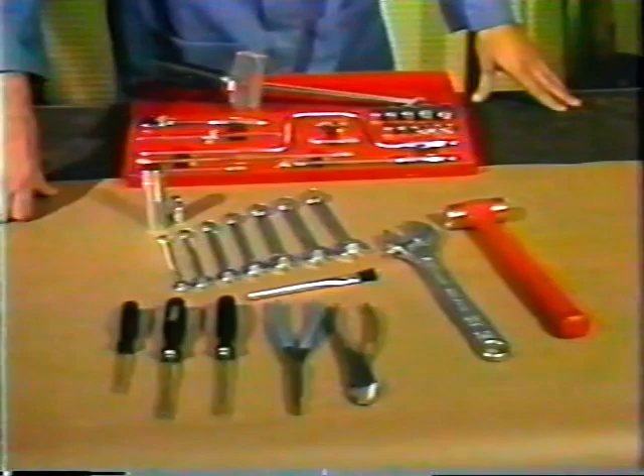We do believe you should become sufficiently conversant with the workings of your airplane to effectively oversee your maintenance program. You should know that FAA regulations allow 28 maintenance functions to be performed by pilots, with the caveat that the work be approved by an A&P mechanic or an approved repair station. This is called owner-performed maintenance or preventive maintenance.

If you are interested, we refer you to Appendix A, Section C of Part 43 of FAA regulations. Several places offer short courses in this activity, and we have a very inexpensive tape that teaches the most important procedures. We suggest that you form a partnership of sorts with your local fixed-base operator in the maintenance of your airplane if you decide to go this route.

This person will very likely be as interested as you are in keeping your costs down and may welcome your increased capability to report service difficulties. In spite of a few bad apples who have tarnished the business, the average FBO is the backbone of general aviation and is driven by the desire to have you be happy with your airplane.

In this tape, we discuss problems that are often generated by the bad apples. Throughout this tape, we will refer to SDRs, or Service Difficulty Reports. These are reports filed with the FAA by maintenance people, FAA agents, and pilots.

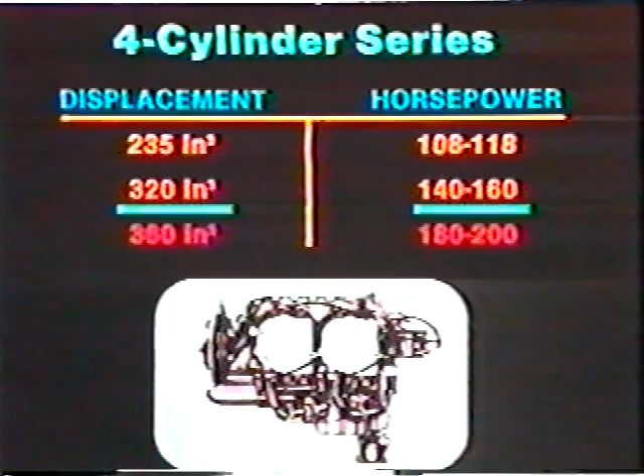We will start with a look at some possible problems that might be encountered in flight. We will look at the cockpit and examine closely those operational functions controlled by the pilot, what happens when systems are activated, and what an observant pilot can do to spot and correct incipient problems.

A minor problem in an airplane is not like a minor cold in a person. Left untended, the cold will go away, but a minor problem in an airplane may quickly deteriorate into the aircraft equivalent of double pneumonia. Our only assumption is that you are a pilot interested in more safety and less cost, and want to be able to know enough about your airplane to report discrepancies and fly it efficiently.

Let's look at a little bit of the accident background of the 172 and a few areas that might cause problems now and in the future. We should point out that the scenarios we have chosen here are usually worst case, but with a little forethought are easy to avoid. It doesn't take much skill to fly safely, but what it does take is knowledge to know what to avoid.

We have studied over 13,000 accident reports over a 3-year period, and are happy to report that the 172 comes off very well. When one addresses the rate of fatalities per 100,000 hours flown, the 172 is very nearly the best in most categories in comparison with other general aviation aircraft.

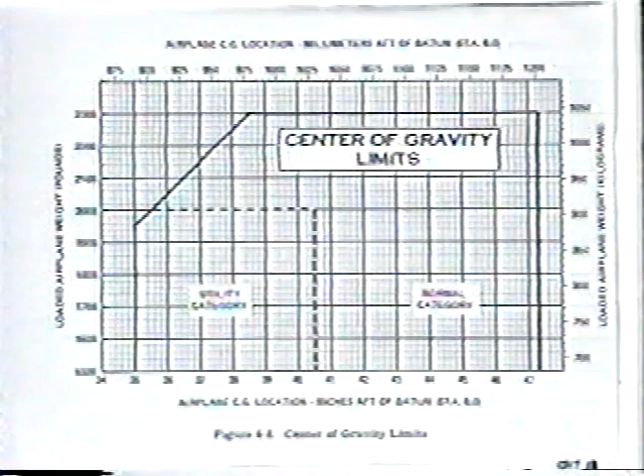These sequences highlight the need to keep the center of gravity in an approved range. This should be true at all times, but it becomes critical when the airplane is being pushed to the edge of the operating envelope. You may be assured that a far aft CG makes a difference in the flight characteristics of the 172, and will make the person who toys with this configuration an unpaid test pilot.

In fact, the normal spin characteristics of the 172 are rather benign. With the introduction of the 172L, and for later models, the dorsal fin was extended forward, and it is difficult to get a clean rotation without using unconventional methods.

A normal entry technique may produce a wallowing, nose-down turning moment to the right, and a nose-down spiral to the left, with an unacceptable speed buildup in either direction. This speed buildup is serious.

The extreme nose-down attitude will have the airspeed approaching VNE while the pilot is contemplating the situation. Each second will magnify the problem and limit elevator pressures to be used in recovery.

The worst configuration imaginable for degrading spin characteristics in this airplane would be a venture outside the utility category with passengers in the back seat and, to ensure graduation from dumb school, lowered flaps. If you are lucky enough to recover, it is almost certainly guaranteed that you will never try it again.

A fairly common accident cause is overshooting a turn and trying to correct to the desired point with back pressure and steepening. This combines the worst of all worlds. The steepening bank and the G-loads imposed by back pressure can be excessive.

If the back pressure is violent enough and the controls are crossed, the airplane may try to snap into a spin. In the 172, this may translate into a downward rotation which has most of the bad characteristics of a spin, and a few of its own.

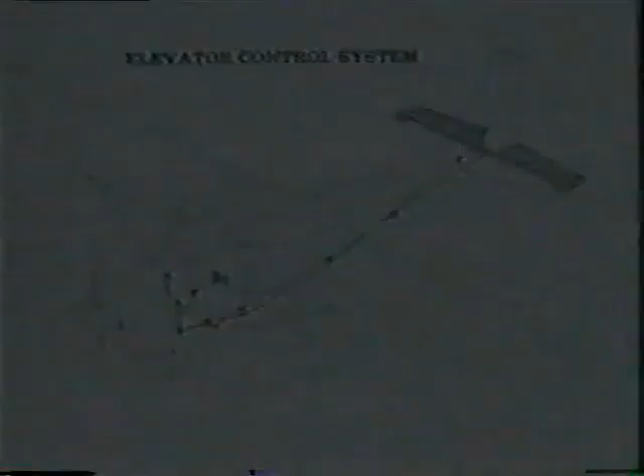We will now look at the flight control system on this airplane and reinforce the information from tape 1. We are not interested particularly in the aerodynamics, but we are very interested in what can go wrong and what you, the pilot, can do to prevent problems by simple observation and early action.

The control lock should be removed. The inclusion of this item on a checklist may seem unnecessary, but we can give chapter and verse of attempted takeoffs when the removal of the control lock had been overlooked.

The check of flight controls is seldom performed in a thorough manner, in spite of the fact that malfunctioning in this area can leave us with a primitive form of an unguided missile. They must be locked and secured before we leave the airplane after a flight, and they should be thoroughly checked before a flight.

The SDRs detail incidents of elevator flopping in wind after a thunderstorm, and another: elevator downstop bolt found bent and broken out of attaching nut plate, damage due to not using gust locks, very costly. These two incidents were not unique. They were taken at random. A number of owners paid dearly each year because of this moment of carelessness.

In this check, we are interested in freedom of movement. The mechanical linkage, the cables, pulleys, and attach points all offer opportunities for failure. The routing on these cables is through areas of wiring and tubing which may impinge on the cables if they become loose. A likely wear point on cables will be at the cable area where they cross a pulley.

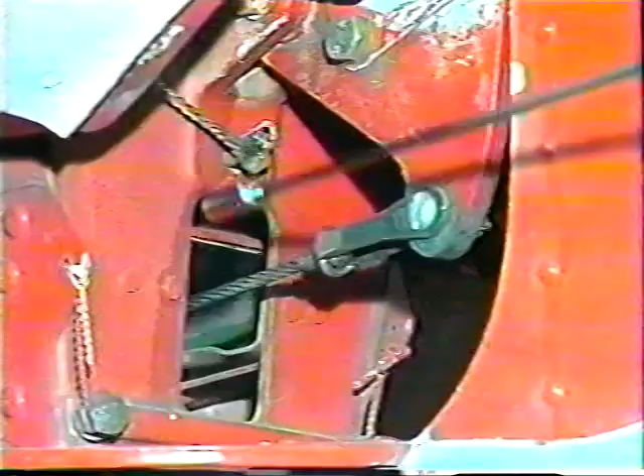We cannot overstate the importance of the provisions for security in very critical items on the airplane. Attach points, hinge points where direction of motion is changed, and all the other points where a bolt or a unit of some kind must be secure are protected with the additional margin of safety provided by safety wire and cotter keys.

Castellated nuts like the one shown here fulfill this function very well if they are equipped with cotter keys. When you see one not so equipped, you should find out why.

In this area, aside from skin surface, we are interested in full freedom of movement of the controls and tabs, and proper response on input from the cockpit. It may be wise to have someone activate the controls while the pilot observes. Always be certain that trim tabs are returned to their proper position when this is done.

The manufacturer has a published cable tension number which pilots and mechanics may find distasteful. Often we hear that the manufacturer's numbers do not provide the control feel that they desire, and the tension is changed, often as much as 30%. This may be operationally pleasing, but we suspect it would be indefensible in court. An owner pilot should know the manufacturer's recommendations and compare them to those on his airplane.

The aileron system is quite simple in design, but you will note that the cables run through several 90-degree bends en route to the surface itself, which makes the security of the pulleys very important. The cables also rise to the wing through an area very prone to corrosion. The aileron check follows the same procedure regarding feel and sound as the elevator check.

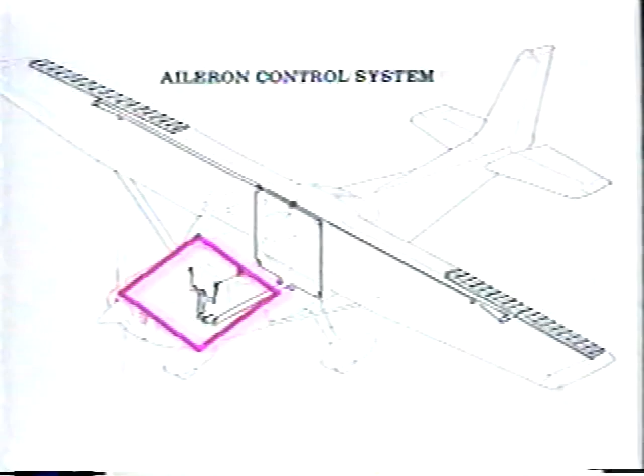We call your attention to the connecting chain and sprocket behind the instrument panel. If these become sufficiently worn and loose, all manner of unpleasant things could happen. The check on this is to hold one wheel firmly and rock the other one. If the play seems excessive, ask an expert. It may be a very important question.

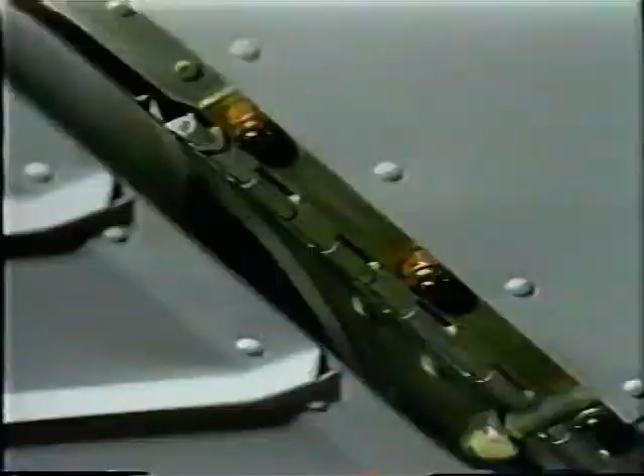Other possibilities are equally entertaining. Consider this service difficulty report on a 172N. Quote: found aileron cable rubbing into fuel line in right rear door post area. Cable had rubbed through protective cover and slightly scored the fuel line. The fuel line support clamp had worked loose and the cable was improperly routed, allowing the cable to contact the line. Unquote. The ailerons are attached to the trailing edge of the wing by 3 piano wire type hinges on each aileron.

This type of fastening was made famous by the aircraft industry of England in World War II. Hinges are secured to the trailing edge of the wing by screws and nuts. The hinge pin is secured by cotter keys in a track very carefully drilled to block the removal of the pin until the key is removed. We have seen reports that the drilling has been less than perfect in some cases, and the keys block nothing but air.

AD 83-22-6 refers to this, but the problem has been found outside the serial numbers covered. Check it out and be certain that cotter keys are there and in place. Like other types of cable systems, these seem to invite intrusion by foreign objects, and this SDR reinforces our argument that a good control check is worthwhile.

Quote: found aileron travel slightly stiff, found a retaining button used to hold control shroud jammed between cable and pulley. Unquote. A prudent person keeps buttons buttoned.

The attention given to the rudder on the airplane by many pilots seems to be confined to wiggling them a bit on the control check and wondering why it seems to be so hard to keep the ball in the center in flight. The very simplicity of the system seems to cause us to frequently dismiss it as being trouble-free.

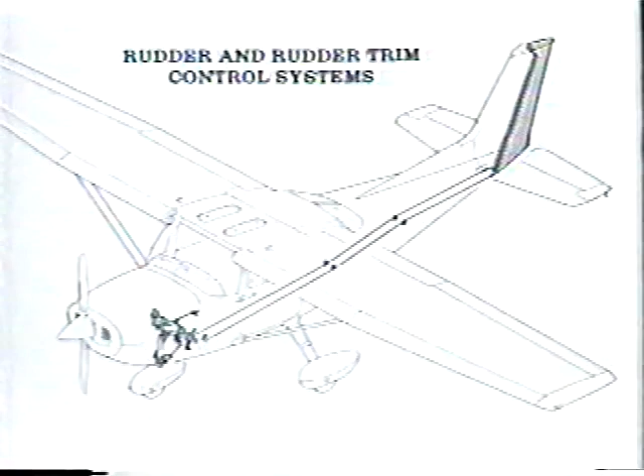The rudder pedals are straightforward and apparently would do justice to a 747. In conjunction with the brakes and a little help at the nose wheel, they steer the airplane on the ground.

We submit the following SDRs for your consideration. Quote: pilot reports aircraft required more left rudder than usual. Rudder torque tube bearings attached to aircraft structure are pulling out of floor and support structure. Unquote. And, quote: during a 100-hour inspection, it was noted that the rudder pedals on the left side were loose. After removing the rudders, it was found that the pivot shaft holes were worn. Submitter recommends a very close inspection of the rudders on the left side.

Unquote. Much of the rudder mechanism is visible to the pilot on a walk-around inspection, using the same standards applied to the other movable surfaces.

We suggest that, as you leave the cabin for the pre-flight, you apply side force on the pedals and rock the pedals back and forth with your hand. Note the relative simplicity of the rudder movement. You may move it with your hand and see several important points which are readily visible.

As with all the surfaces, the attach points and the rivets supporting them to the structure, and as far into the leading edge area as you can see, must be monitored for security and corrosion.

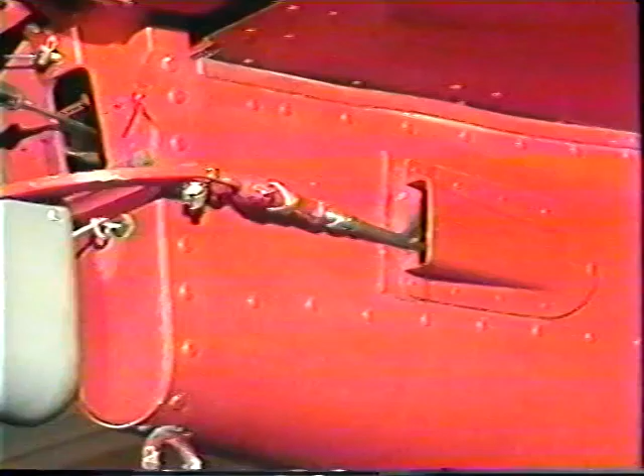The fittings which control surface movement are particularly important and should be looked at very carefully. Beyond this, the cable system which transfers the pilot's input to the surfaces should be a matter of concern.

If we go into a careful and thorough pre-flight and walk-around inspection, we will be able to get a handle on the maintenance standard that has been applied to the airplane.

The pre-flight inspection is often treated carelessly. Aside from the safety items which may be uncovered, a pilot performing preventive maintenance will need to constantly monitor the well-being of the airplane. The fact that a pilot is empowered to remove the cowling and inspection plates, provided they are replaced to the satisfaction of an A&P, is a long step forward.

We have covered much of what the pilot should see in tape 1 of this series. The exterior walk-around inspection should be used to reinforce the information you have gained in the cockpit. You should touch and activate the same controls you activate in the cockpit. Items that may seem obscure should be examined for possible decisions.

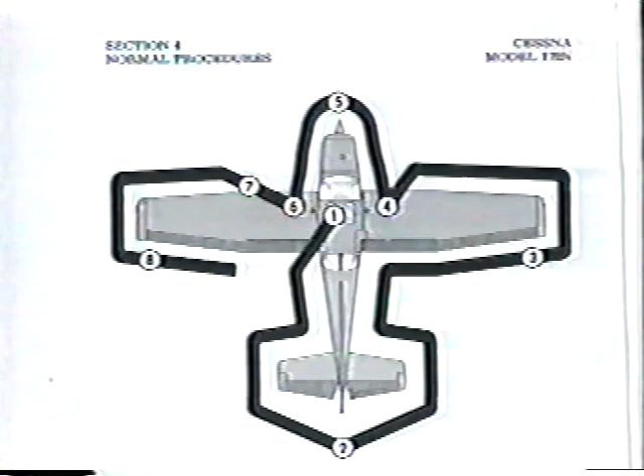All skin surfaces are worthy of close inspection, but it is particularly important on empennage surfaces, including the horizontal and vertical stabilizer. The firewall area is particularly susceptible to cracking and wrinkles if hard landings or nose wheel first landings have been made. If cracks, wrinkles, or corrosion are found, they must be examined in depth immediately by a qualified repair person, and complete findings be made a matter of permanent record.

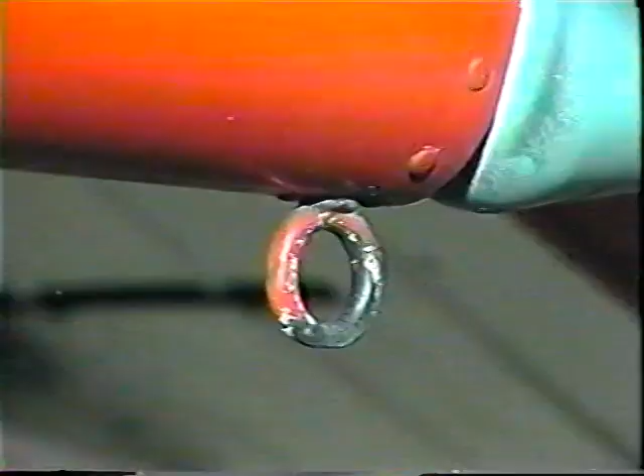Court cases have been entered where wrinkles over 20 years old were part of the basis for a decision. Aside from taking you to court, these imperfections can lead to tragedy if they are not handled in a timely manner. In passing, it is worth looking at the tie-down ring.

We once witnessed an attempted takeoff in a tiny wooden airplane with a large concrete tie-down block firmly anchored to the tail wheel. The little plane flew a little, but the block was never able to get airborne, although it did bounce rather well. Finally, the tiny craft reverted to its natural state of kindling wood. The pilot said he thought it taxied funny. The media thought it was funny too.

We now direct your attention to the flaps. From time to time, the walk-around inspection should be done with the flaps in the full down position to evaluate the condition at the attach points.

There is some variety of methods of lowering flaps, but this model works with an electric motor protected by a 15-amp circuit breaker. If the circuit breaker pops out, and pops out again when it is reset, the landing should be made with no flaps, with no more attempts to reset the breaker.

This airplane has a single slotted flap, which is designed to droop below the trailing edge as much as 40 degrees in some models when fully lowered. The flap section is pushed back and away from the wing as it comes down. This allows high-energy air from below the wing to be ducted over the flap. The renewed airstream gives the boundary layer needed velocity to delay airflow separation, which increases the coefficient of lift further.

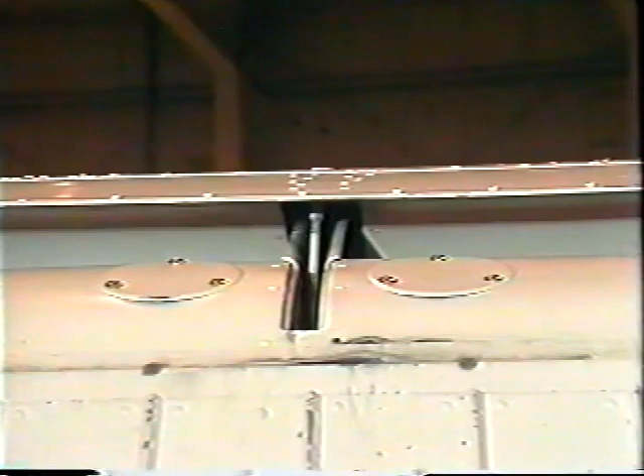This is something every pilot should be aware of. Black stains in an area of the surface where there is not likely to be oil stains are very likely powdered aluminum. This indicates wearing abrasion of a serious nature. Rivet heads may be the first casualty, but any point of surface-to-surface contact should be suspect. This may indicate improper rigging and/or a malfunctioning limit switch.

An inspection of the leading and trailing edges and wingtips is important for other reasons as well as safety. If you find hangar rash in time, you may also find someone willing to pay for having it fixed. Careful attention to the wing is particularly important in older airplanes. As we have noted, we have seen recent service difficulty reports spelling out spar cap corrosion. Look as carefully as you can in your inspections, and discuss this with your A&P when convenient, particularly if the airplane has been operated in a high-risk area of high humidity and/or salt.

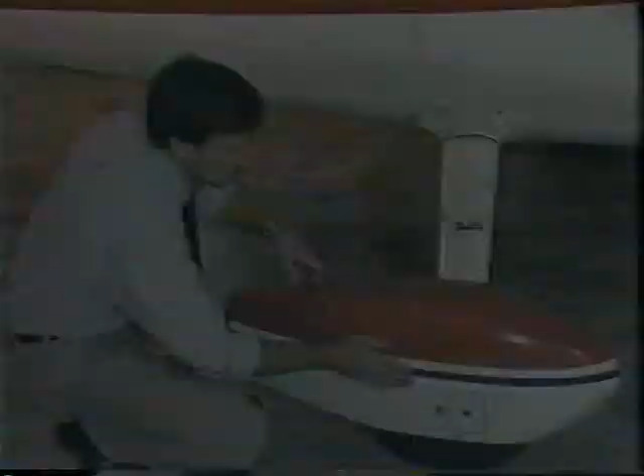Inspection of the landing gear area should range from the attach points at the fuselage, where the interest may include possible wrinkles indicating hard landings, and extend to the brakes. It is somewhat difficult to evaluate the brakes on these airplanes with the wheel pants installed, but cockpit indications will tell us much.

This pitot static system drives the readings on the airspeed, the altimeter, and the rate of climb indicator. The pitot tube provides the ram air source, and there is a static port on the lower left nose section.

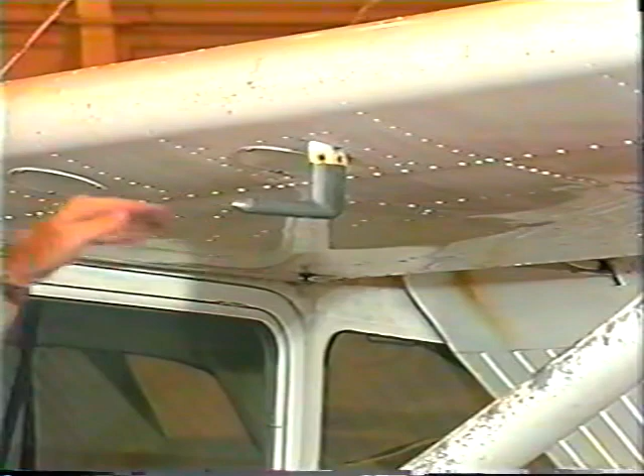Your pitot head may have a heating element. If so, check it from time to time by turning the heat on briefly and touching it gently. You should also get an ammeter indication when it is turned on. Most instrument pilots turn the heat on anytime visible moisture is expected. Do not blow into this pitot head.

Contrary to popular belief, ice blockage in the pitot head may not reduce the airspeed reading to 0. If the pitot head is frozen, only static air will be driving the airspeed.

From an NTSB report, we find that an airline captain on a ferry flight failed to follow his checklist and turn on the pitot heat. As he climbed, the airspeed apparently increased. To compensate for the supposed buildup, he pulled the nose up until he stalled and spun in.

When instruments appear to fail in this system, pulling the alternate static air valve will move the source from the static port to the cabin interior. This will create a modest variation in readings, which should be noted, but if the pitot head is iced up, it will not restore the proper airspeed reading. The tape covers used on the airplane static system during washing should always be removed before flight.

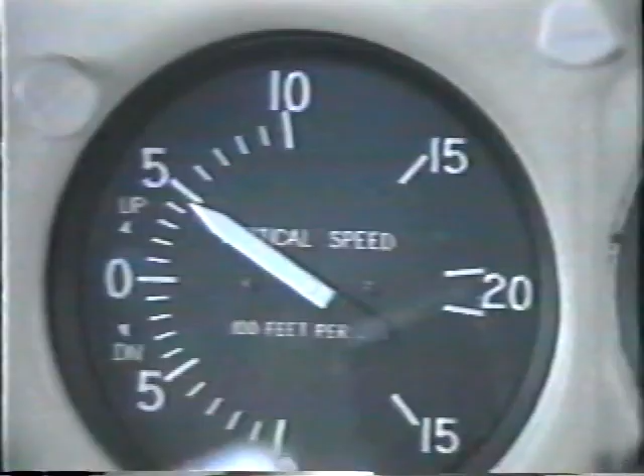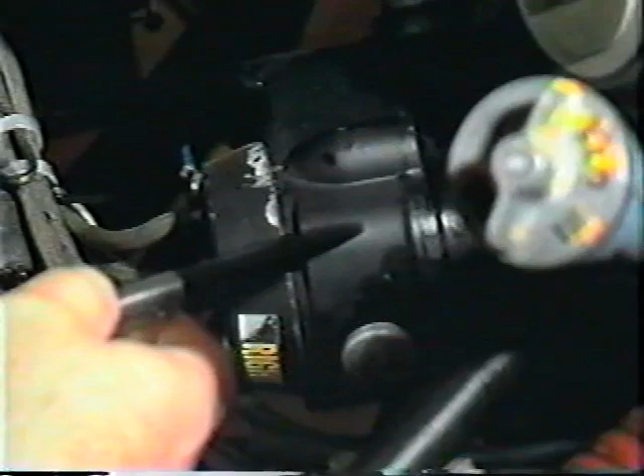The brain of the engine is the ignition system. This consists of several elements. The ignition switch has an off, left, right, both, and start position. The dual magnetos are manufactured by either Bendix or Slick. Spark plugs of a specific type are spelled out in the owner's manual or the maintenance manual.

Other than the battery for turning the starter, the ignition system is independent of other aircraft systems and is activated when the engine is turned over either by the starter or manual movement of the prop. The magnetos fire independently, and if they are not grounded and are hot, they will fire with a rotational movement of the prop. Thus, people around a propeller should always treat it as though the mags were hot.

There is no guarantee that the off position, which grounds both mags through the P leads, is functional. A simple check of this problem is to very briefly turn off both mags from a low idle condition of 500 or 600 RPMs. A moment of silence will tell you that the mags are grounded when the switch is off. Do not use a higher RPM, which might cause a backfire.

This check will not give you carte blanche to be careless around the propeller. A P lead can malfunction while you are getting out of the airplane.

The left mag fires the top plugs on the left side of the cylinders and the bottom plugs on the right side, with the right mag firing bottom on the left and top on the right. The both position allows a sequential firing order of both.

When the start position is selected, it permits power to flow to the starter from the aircraft battery. A sliding mechanism on the starter will then move forward and engage the teeth of the ring gear, which will cause crankshaft rotation. The magnetos fire, and, if the other necessary things have been done, the engine will start.

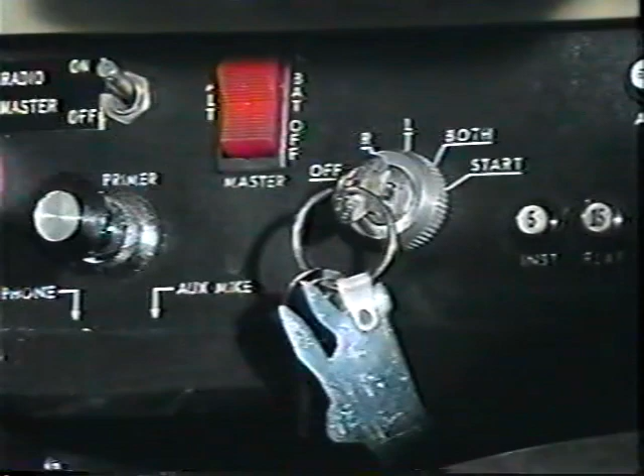A couple more things about the ignition switch. One pilot found that when his engine quit with sudden dead silence at altitude, wiggling the ignition switch restored power. It's worth a try if it happens to you, but we suggest that if the switch can be wiggled around very much, you probably need a new switch before you do much flying.

Another person found that the key could be easily pulled out of the switch when it was in the both position. Might not be a bad thing to check the next time you pre-flight.

Mag timing should be checked every 100 hours by a competent mechanic. An indication of this problem for the pilot's attention might be the engine firing backward, jerking the prop back momentarily in the starting process. If the engine starts after the release of the starter, it is probably an impulse coupling problem. Be very prompt to seek knowledgeable help when mag symptoms develop.

The mag may destroy an engine if it comes apart. A specific magneto check is mandated by an AD for Bendix mags, and Slick recommends a complete check at 500 hours. Beyond this, the magnetos are sealed units and not likely to be examined by the pilot beyond the routine left both, right both ground check.

But this check, usually performed between 1700 and 1800 RPM, tells us quite a bit. The magnitude of the individual drop is not as important as the difference in drop from right to left. This difference should not exceed 50 RPM. If it does, the problem very likely will be in the spark plugs, and in most cases can be corrected by leaning the mixture and applying a few seconds of fairly high power.

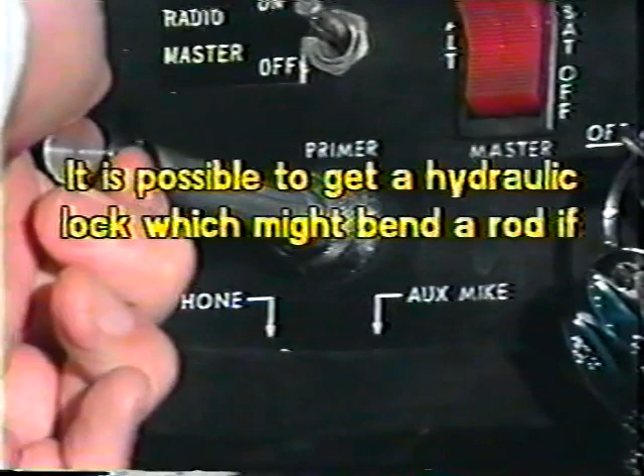Cessna details use of the primer in the start procedure, and we feel 1 to 3 shots, depending on temperature, will be adequate.

The electrical system on this airplane is a 14-volt, single-wire, ground return system. This means that power distribution to most units is through a bus bar, and each unit is grounded to the airframe. The bus supplies a circuit breaker panel with each breaker clearly identified as to purpose and amperage. In 1978, the 14-volt system was changed to 28 volts, beginning with the 172N. But the principles below are not radically different.

The power sources are a 14 or 17 amp-hour battery and a 60 amp alternator. Earlier models had generators, but all can be converted. The alternator produces AC current, which is converted to DC by a silicon diode rectifier. This DC current resupplies the battery and is directed to the main bus through a 60 amp circuit breaker. The main bus is the primary distribution path for aircraft power requirements. The electrical energy powers the starter, the lights, the avionics, the flaps, some instruments and switches, and the pitot heater.

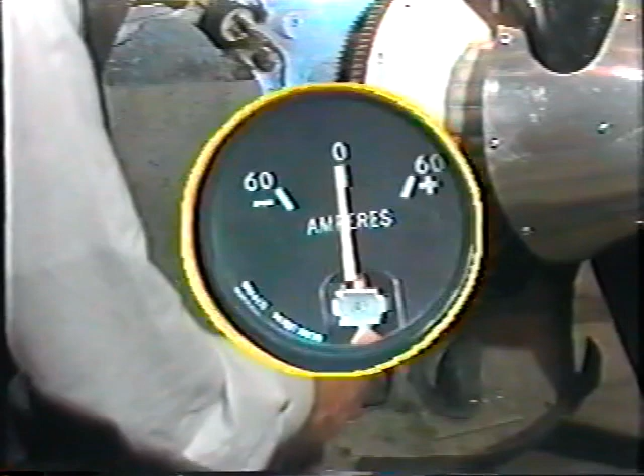A communications center to the pilot is found in the ammeter. This indicates the charging rate to the battery, and the information tells the pilot a great deal about what is happening in the electrical system. Most electrical problems relate to insufficient rate of charge or to excessive rate of charge.

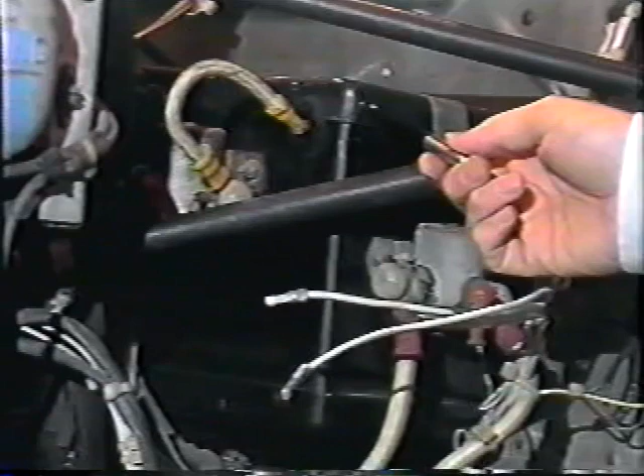The master switch is a split rocker type switch with on and off positions beginning with the 1970 172K. The left half, labeled Alt, controls the alternator, and the right half, labeled Bat, controls all electrical power to the airplane. Alt Off will drop the alternator from the system, leaving only the battery to handle all loads. The battery is used for normal starting, absorbing system surges or spikes, and for emergency electrical power in the event an alternator failure should occur.

The battery box, in use until the N model in 1979, is vented overboard to dispose of the electrolyte and hydrogen gas fumes that are discharged during normal operations. To be sure these fumes are disposed of properly, it is a good idea to frequently check the vent hose connections at the battery box for obstructions. A major source of dangerous and expensive aircraft corrosion may be found in this area and is always the product of neglect.

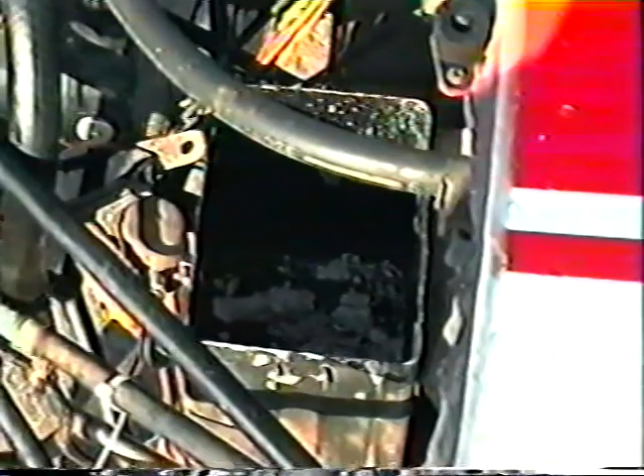One SDR reported that the battery box had come completely detached from the firewall and fell into the cowling below.

The electrolyte level in the battery should be checked every 25 hours of operation. The level should be maintained by adding distilled water only. Add only enough water to cover the plates, and never fill more than 1/4 inch over the separator tops.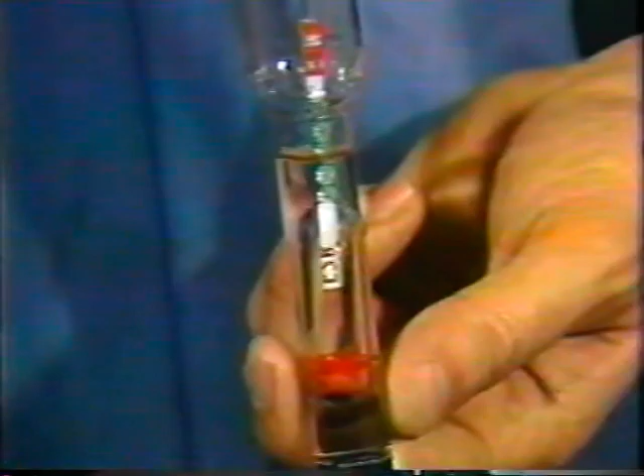We suggest that at this time the battery be removed and the battery and box be washed with a soda water solution. Normal operations may not require much service, however hot weather operations may dictate more frequent checks.

The battery check is seldom done by most owners, but it is a very inexpensive way to head off costly repairs and possible replacement due to a low, dead, or frozen battery. Remember that a low battery can freeze as high as 13 degrees Fahrenheit, whereas a fully charged battery will still be reliable to nearly -80 degrees Fahrenheit.

The owner is entitled to perform battery maintenance under certain prescribed conditions, and this is one area where many savings can result. Like most things on an airplane, mistakes can be costly, and one should learn the proper maintenance techniques.

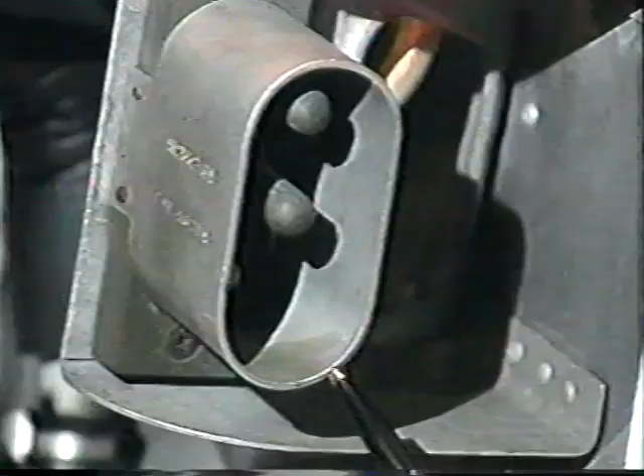Provisions have been made in the construction of the aircraft to make it possible to have a fully discharged battery in the aircraft during an APU start. This approach should be treated with caution.

The battery could accept a high rate of charge over a long time period, and this could overheat the battery. This could boil out the water, or it could buckle the lead plates and eventually damage the battery beyond repair. It would be better to remove the battery and have a bench charger hooked up, so the battery can be charged at a lower rate and the condition monitored during the recovery period.

A normal battery will require only a trickle charge to maintain its full charge condition.

During an engine start, there will be a large drain on the battery. With the alternator on the line, there will be a high charge rate that will gradually diminish until the battery is fully charged. It may take 5 to 10 minutes to complete this charge cycle if the battery condition was low to start with.

The 172 does not make heavy demands on the battery in normal operations. Thus, an extended high charge rate may be an indicator of trouble and should be regarded with suspicion until the cause is known.

A battery that has a dead cell or shorted plates will continue to demand a charge. This can be detected on the ammeter if there is indeed a short. The battery check will continue to show a higher charge rate as long as the battery is in the system.

The avionics switch should be on only when you are assured that there will be no transient voltage spikes. Although it is protected by a circuit breaker switch, the best protection is isolation. When doing ground service on the avionics equipment, it is recommended that a battery cart be employed to ensure a stable power source.

Discharged completely, there will be no hope of regaining power from the alternator, even if it was operating at the time of shutdown. The alternator requires at least 2 amps to the field coil to excite and begin operation.

Upon shutdown, it retains very little residual magnetism and must have the battery to provide the 2 amps to the field circuit once again. With a ground power unit plugged in, a special fused circuit will close the contactor when the master switch is turned on.

This will allow a dead battery remaining in the aircraft to take a charge and activate the alternator when the engine is started, although this, as we have stated, should be handled carefully.

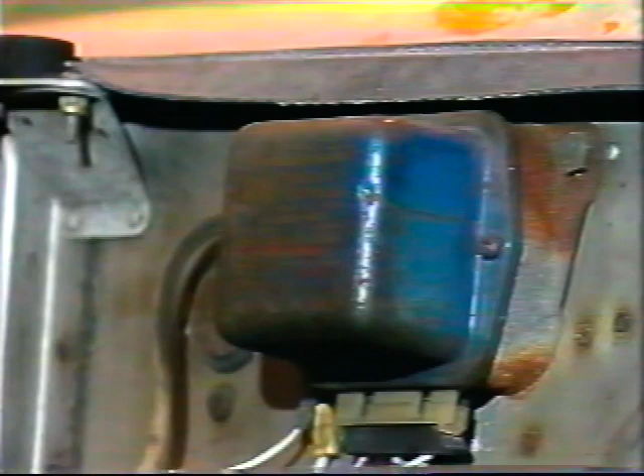A voltage regulator, operating on a demand basis, controls the voltage output. If the voltage is too high, a movable contact puts a resistor in the circuit, which drops the excitation and the output voltage. If bus voltage is too low, the coil spring removes the resistor and increases output voltage.

By the time the flight has stabilized for a time at altitude, the ammeter indication should be less than, certainly no more than, a 2-needle width charge rate. If it exceeds this indication for an extended time, the battery may overheat and boil away electrolyte. If a faulty voltage regulator is the cause, electronic components could be damaged.

When the rate reaches a preset value, the overvoltage sensor will shut down the alternator and light the overvoltage warning light. This light is not always located in a highly visible area, and it is often difficult to determine if it is indeed lighted in certain lighting conditions. If in doubt, cup your hand around the light to darken the area.

One may check to determine if the problem was a transient one by turning off the avionics master switch and then turning off the alt and bat master switch. Turn the alt and battery switches back on. If the warning light does not come back on, normal charging has resumed and the avionics master may be turned on. If the light comes on again, a malfunction has occurred and one should go immediately to the electrical malfunction checklist. Land as soon as it is practical to do so.

An owner who is interested in preventive maintenance would do well to examine the state of the alternator on pre-flight. Loose or broken belts or cracks near the welds might be uncovered before they become a major problem.

We refer you to a few things our research has turned up. Quote: shortly after takeoff, aircraft experienced alternator failure. Investigation of cause revealed alternator belt had been broken by the alternator's upper support bracket coming loose, falling out, and becoming wedged between the engine drive pulley and belt. Unquote. Shake those things and pull on the belt at pre-flight.

Look as far as you can see, and when you have time to get the cowling off, get a little mirror and flashlight and look the area over.

Here is one that says something about carelessness. Quote: upon removal of the cowling for oil change, it was noted that there was an oil leak. During inspection for the oil leak, it was found that the wire bundle for the alternator and the starter wire were improperly secured to the oil return tubes, causing the wires to chafe the tubes and eventually cut them. Unquote.

We won't quote the price of an alternator, but we are told that a large number are replaced each year simply because the maintenance people failed to do what these people did to solve the following problem. Quote: intermittent loss of alternator field voltage, cleaned terminals and switch, problem solved. Unquote. Before you buy an expensive alternator, put a meter throughout the system.

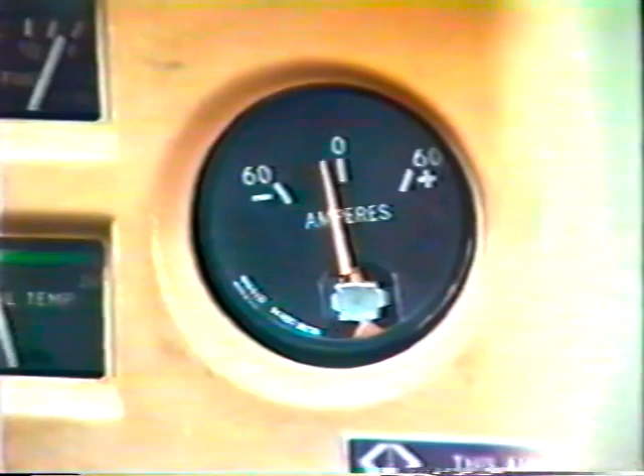For example, an alternator reading of 14.5 with the voltage regulator sensing 13.5 volts would indicate resistance in the circuits. By the time the problem has progressed to the point of complete loss of field voltage, many owners are quite receptive to owning a new alternator which will last about 4 months. A little time in cleaning the terminals may save you enough money to fly down to Acapulco.

Let's look at an unethical and dangerous practice. The SDR reads, quote: alternator inoperative, found auto brushes installed. Wire in one brush came unbonded. Brushes worn out at 241 hours total time. This alternator overhauled by repair station. Submitter states auto brush leads copper colored, aircraft brush leads silver color. Keep finding this in overhauled alternators, unquote. If I did this, with my luck, I would probably land in jail.

And so it goes. Loose inspection of the leads, the belts, the pulleys, the brackets, the switches, all leading to failure, forced landings, some pain and suffering, and nearly always a deflated wallet. This tape just isn't long enough. There are enough examples to fill a library.

Just about the worst encounter you may ever have with your electrical system would be an electrical fire in flight. Although this seldom leads to tragedy, it is guaranteed to grab your attention.

Internal propeller failures are generally not within the control of the pilot. However, subsequent actions are, and the wrong response can have dramatic results indeed. Procedures which might avoid failure and blade care are under pilot control. Both must be correct and stem from knowledge, or your engine may begin to sound like an electric motor just before it leaves the plane.

We are sure that the pilot of this 172M could give a much more dramatic account of the importance of this mindset than the simple line in the accident report: '18 inches of the propeller blade separated in flight.' We do not know how the pilot handled this failure, but it seems to us that should one seem imminent, the best chance is immediate closing of the throttle. If you are successful, the vibration will no doubt discourage you from opening it again.

We need not experience the airborne equivalent of being struck in the head with a 2x4 to know that the blades deserve close observation during pre-flight for nicks, stress cracks, or abrasion. Any type of damage exceeding 1/8 of an inch in depth should be referred to a certified mechanic for repair. Nicks in the outer 18 inches of the prop blade must always be treated as critical. This is the area of highest vibratory stress, and all repairs must be also accomplished parallel to blade axis.

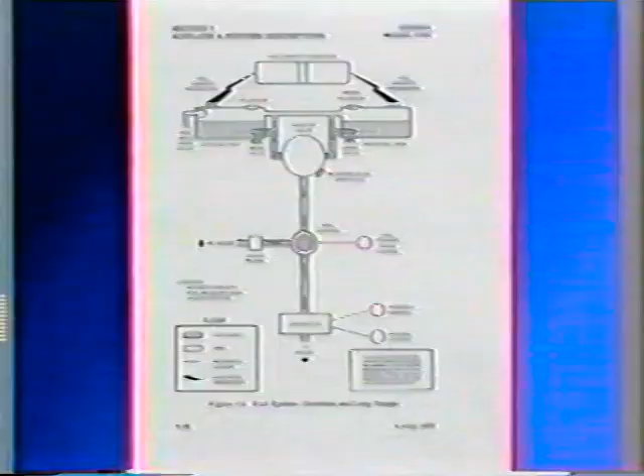Let's look at what makes the power plant go. Obviously, it is fuel and air, with the oil system helping. The system consists of 2 fuel tanks, which by virtue of the high wing design permit a gravity feed to the strainer and carburetor. In spite of the simplicity, the system is responsible for a high percentage of SDRs on the airplane.

A check of the fuel quantity gauges is necessary as a cross-check of your visual inspection at the filler points. Note the readings and compare for accuracy.

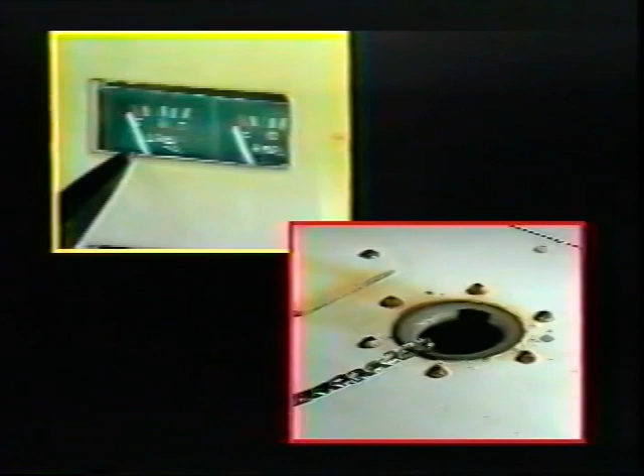Fuel mismanagement can lead to one of the most embarrassing and potentially dangerous episodes in a pilot's career. One should always begin a pre-flight analysis of fuel requirements with a healthy skepticism of the fuel gauges, the published fuel burn numbers of the manufacturer, the winds aloft, and FAA's published minimum fuel requirements. Each aircraft should have a fuel burn log, and the pilot in command should trust no one but himself in determining that the fuel requirements for each flight are met.

Nor should a pilot hesitate to land and top tanks away from home if the plan begins to go astray. A pilot may be complacent about the stock market or a poker hand, but the stakes are much higher when one becomes complacent about fuel requirements. As you shall see, the airplane has enough problems with fuel without the pilot adding to them.

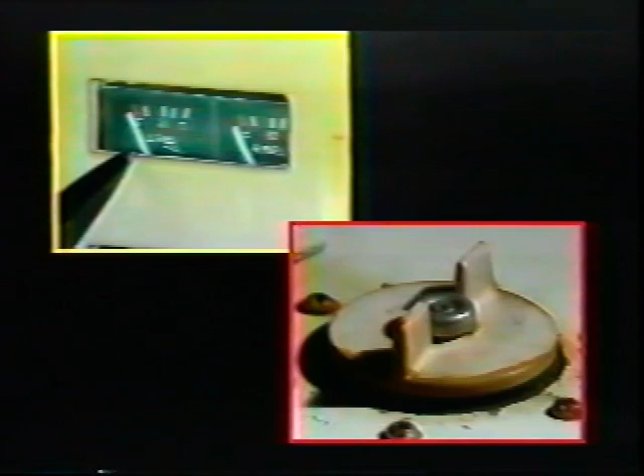The fuel flows through a 4-position selector valve labeled left, right, both, and off. In the both position, the 2 tanks are fully interconnected, and fuel may flow from one tank to the other. This makes it impractical to measure the fuel burn in any one tank, but rather requires that fuel burn be taken as a total.

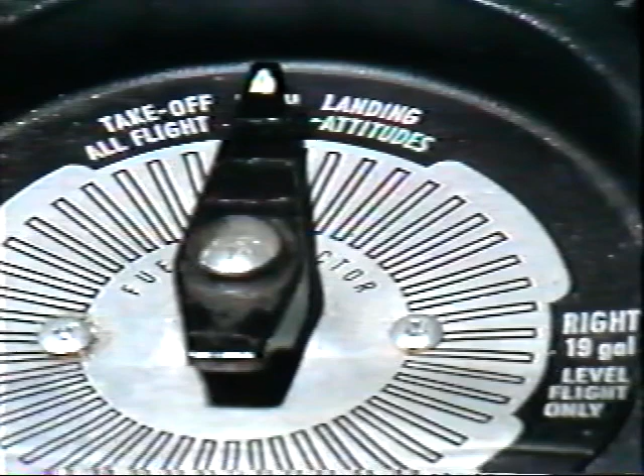Care must be taken when the aircraft is parked that the fuel valve is either in the left or right position. Otherwise, if the terrain places one wing higher than the other, fuel may be vented overboard. Of greater importance is the fact that condensed moisture may run away from the sump drains and not appear when the check is made, but will return to haunt you when the plane is in level flight.

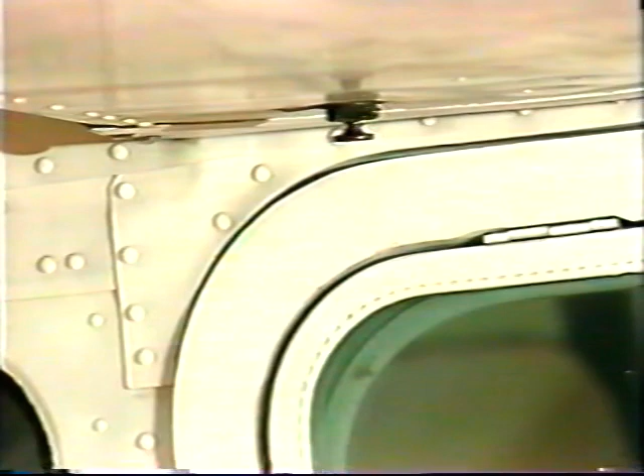There has been a continuing complaint about uneven fuel feed, and the left and right selectors are used to level tanks and avoid wing heaviness.

Vapor lock has also been a problem, and some placards have been issued requiring a switch to single tank operation above 5,000 feet. In the event of engine stoppage, switching tanks immediately to a single tank, not both, and then back, has been successful in restoring power.

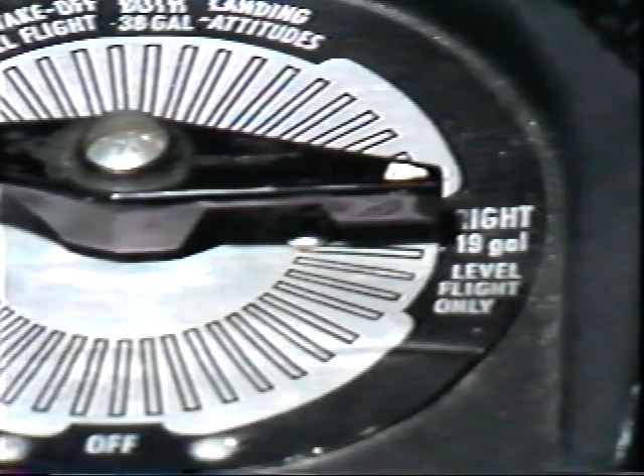The interconnected vent system is also critical. The right filler cap and a vent located under the left wing in the stagnation region behind the strut provides stabilized air for the system. This position minimizes ice blockage.

The left wing vent vents overboard, but functions as a check valve. This vent has a history of becoming plugged. It seems to attract insects. The positioning is important, since some movement might place it into a ram airstream or into a position to get a venturi effect, applying either pressure or suction. The check valve will continue its protective function, but the vent system will be inoperative.

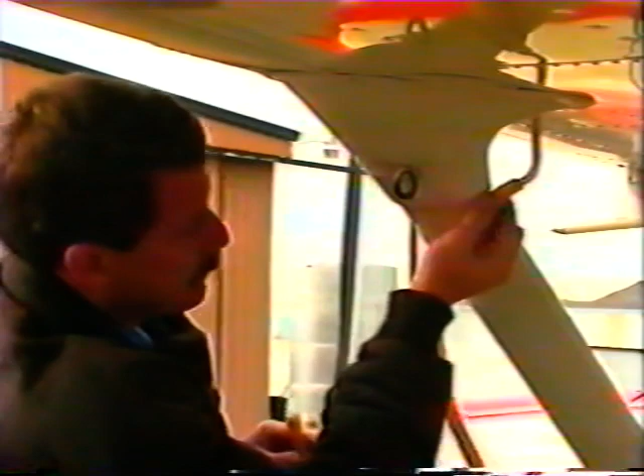Both of these vents should be examined with great care to determine that they are functional. It has been suggested that air pressure applied by blowing through a surgical tube fitted over the vent can determine if it is clear. If a blockage is encountered, someone familiar with the procedure may blow it clear with compressed air after removing the filler caps. It is important that this vent not be confused with the pitot tube when this check is made.

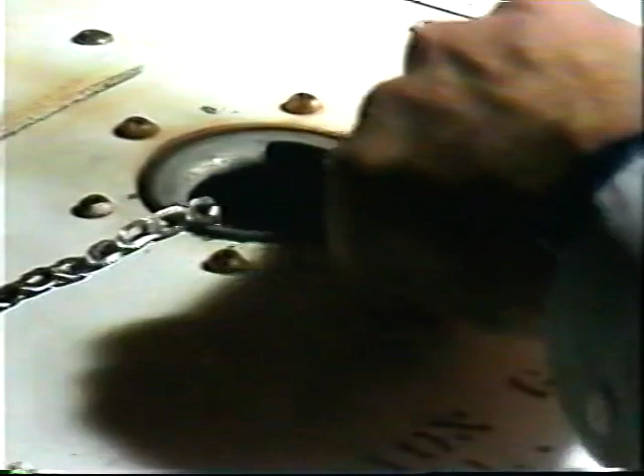Beyond this, flying the airplane with the ball out of center may promote uneven fuel feed. A recurring problem that is important is cracking at the welds around the filler port. The refuelers lean the nozzle against the side of the opening, and it is not stressed for this. The pilot should confirm that the refueler is aware of this and will conform to the proper method before he entrusts the fueling to him.

A typical report reads: 'Pilot reported fuel leaking from bottom of wing. Inspection revealed that the fuel tank was cracked around the fuel filler bracket adjacent to the weld, probably caused by fuel nozzle resting on filler bracket when servicing. Tank leaked only when full with fuel.' In this case, there may be a strong fuel smell in the cockpit when the tanks are full.

First and foremost, we want to determine that there is no water or other impurities in the fuel. We know failure to make this simple check created an unscheduled landing in the middle of an African jungle for the writer of this segment. The color and smell identify the grade that is specific to your engine. Refuelers have gone so far astray as to load jet fuel in reciprocating engine aircraft. This check should be done at all drain points, but is particularly important at the strainer drain.

It is possible to obtain an STC to use automobile gas. Quote: 'Aircraft is certificated to use auto fuel. Used it for 2 to 3 years until found under certain conditions it would get vapor lock if it were flown on a hot day. If parked for a few minutes, then started and a takeoff attempted, it may lose power abruptly, gets your attention, and could be disastrous.' Unquote.

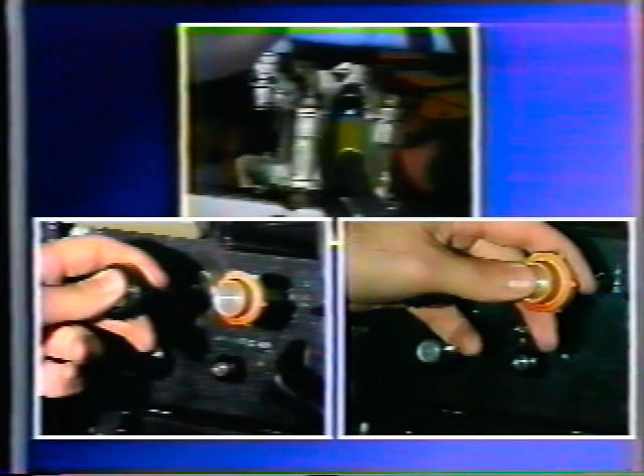The fuel and air meet in the carburetor where they are mixed in the proper proportions. The throttle and the mixture control adjust the air and fuel being fed through the induction system. The mixture is taken into the cylinders through intake tubes, leading to intake valves, and introduced to the combustion process by the firing spark plugs.

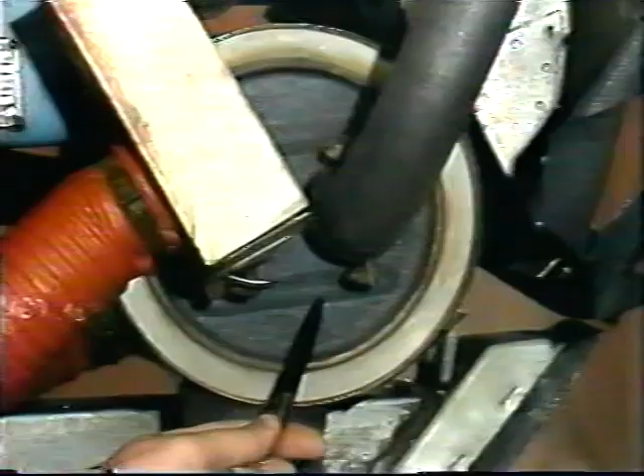The exhaust valves open, and exhaust gases perform other functions en route to going overboard through the exhaust tubes, the muffler, and the tailpipe. In your inspection of this system, you will be interested in cracks around the welds where the exhaust tube joins the cylinder. Unequal expansion makes this area a likely spot for cracking.

The exhaust gases going through the muffler provide a great deal of temperature to the muff surrounding the muffler, which can be used to warm the cabin. A most important function for the pilot is the measurement of the exhaust gas temperature through a probe located high up on an exhaust tube. This information is read out on the EGT gauge in the cockpit and is the primary tool for the efficient management of engine operation. As might be expected, the carburetor is more sensitive to careless inspection than most other systems.

It receives errors from the induction system as well as the fuel system. For example, quote: 'Pilot reported engine failure 100 AGL after takeoff. Safe landing made on remaining runway. Paper element from filter found shredded and injected into carburetor.' Unquote.

Quote: 'Excessive buildup of birds' nests in the engine compartment. Debris somehow worked its way down through hoses into carburetor intake, blocking venturi, not allowing static RPM for takeoff.' Unquote. Even if you use intake plugs, leaving your aircraft parked for some time with the prop in a vertical position may not be a bad idea.

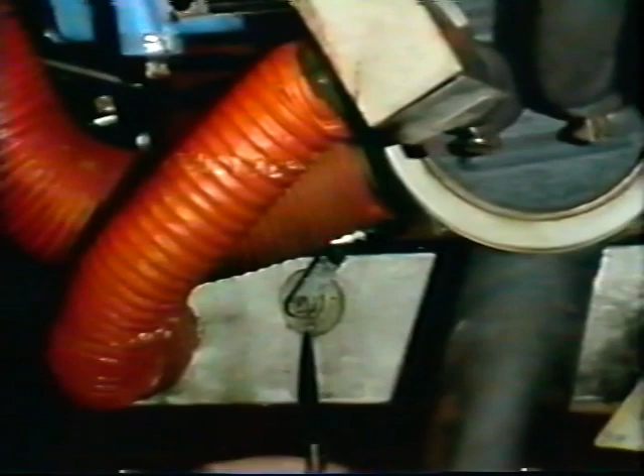The carburetor air box channels air to the carburetor, and provisions are made for cleaning and warming the air as necessary. First, it must pass through the air filter. The filter consists of a retaining mount in front, followed by a paper or foam filter, and then a wire mesh to hold it in place. The filter should be checked for foreign objects and cleanliness, but the filter itself may present a hazard, as SDRs attest.

Quote: 'Expanded mesh came apart in 4 pieces, allowing foam filter to be ingested.' Unquote. This is not a one-time thing. In addition to foam, in others, paper and wire worked their way up to the carburetor.

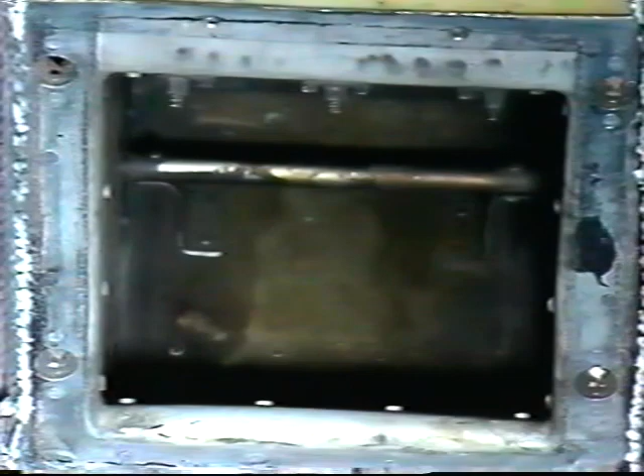From the filter, the airflow goes to the air box, then to the carburetor, and to the intake tubes, on its way to the cylinders, where it performs its mission. If ice or debris should block the flow of air, and there was no alternate source, the engine would surely die. Fortunately, there is an alternate source.

Unfiltered air is obtained from the engine compartment to a shroud around an exhaust riser which heats it. From there, it flows into the air box. The amount of heat is regulated by the carburetor heat control on the instrument panel. The control operates a valve in the air box, with the valve setting determining the amount of heat flowing to the carburetor.

Two properties of this unfiltered air are changed. One, since the air comes from the engine compartment, ram effect is lost. Two, the heat makes the air less dense, so we may expect a reduction in power and a consequent mixture enrichment. This may be reflected in the loss of as much as 225 RPM.

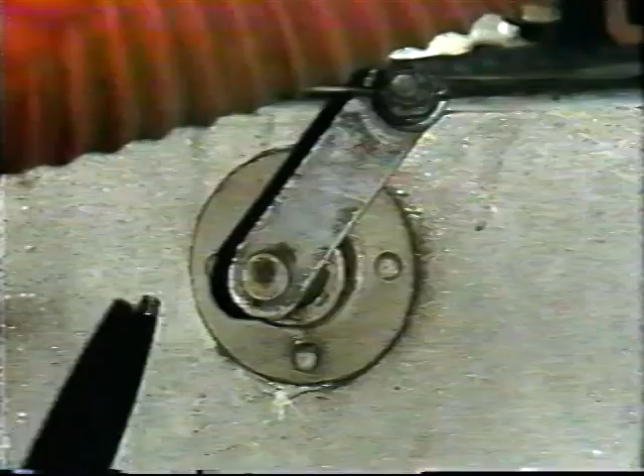The carburetor heat box has been responsible for the creation of several SDRs. This one is so similar to many others, it makes one think that some attention should be applied to this area. Quote: 'During annual inspection, carburetor heat box valve shaft had loose rivets and was not giving full carburetor heat.' Unquote.

One thing is certain, on a carbureted engine there will come a time when you will want all the heat you can get, plus some more you will wish for.

Carburetor ice formation is a hazard which may creep up unnoticed at first. The usual gradual power loss may be ignored or discounted at the pilot's risk, and attempts for correction may be made by simply advancing the throttle. If the condition persists, the engine will begin to run rough. Beyond this point, if indifferent or careless attempts to correct the problem are attempted, the engine may quit. Should this happen, the problem has taken on different proportions. The source of heat, a running engine, has been lost.

When the symptoms appear, use full throttle and full heat until the engine is running smoothly. If continued heat is necessary, determine the control setting for minimum heat needed and lean the mixture as necessary. Throttle settings may be consistent with cruise operations.

Quote: 'Caution, carburetor heat should not be used during takeoff unless it is absolutely necessary for smooth engine operation and acceleration,' unquote. This caution note from the pilot's operating handbook is a roundabout way of saying that you need all the power you can get for takeoff. And unless the power check gives you the required readings at full rich and full power, you might be able to cure the problem with carburetor heat.

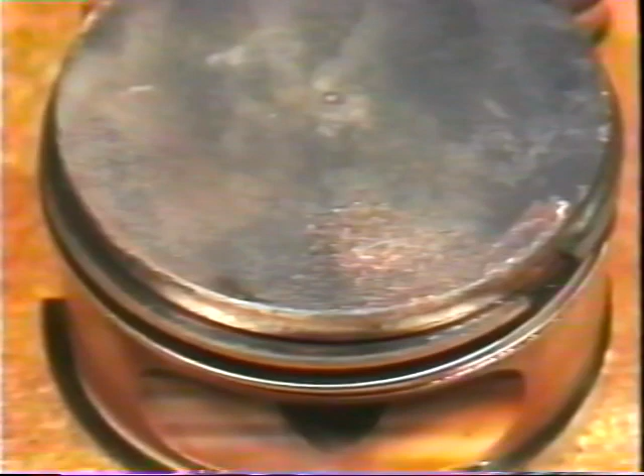From the pilot's point of view, the control of the air-fuel ratio is probably the most important contributing factor to long engine life. Improper use of the mixture control can drastically shorten engine life and cause costly repairs. For this reason, we will turn our discussion to what is considered to be the ideal mixture and the problems associated with misuse of the mixture control.

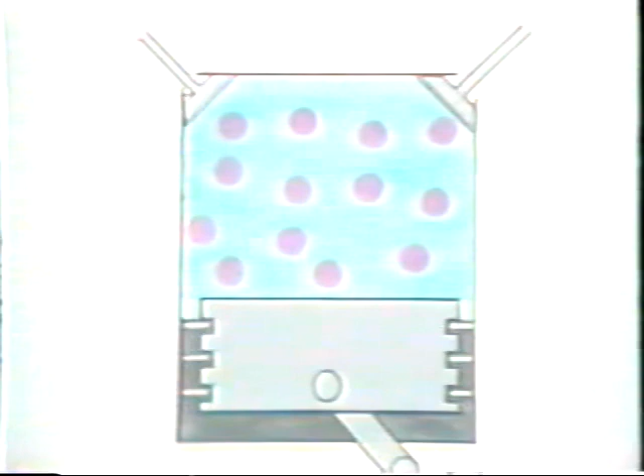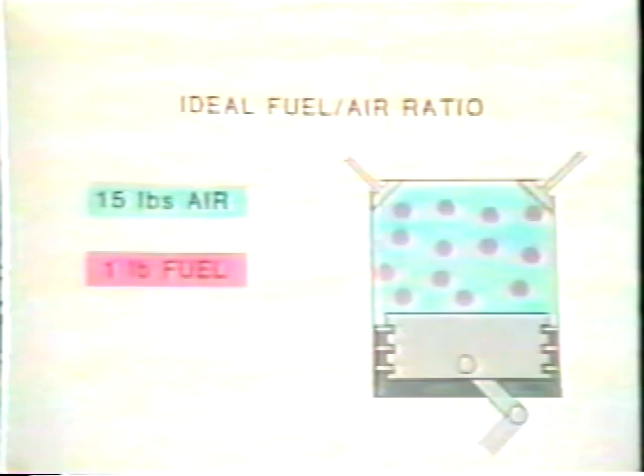As we plot a continuous range of fuel-to-air ratios, at some point we will produce a mixture which develops the maximum amount of heat during the combustion process. This ratio is approximately 15 pounds of air per pound of fuel, or about 6 2/3%. The exhaust gas temperature gauge gives us a reading of this interaction and provides us with our best tool for proper management of our fuel and induction system.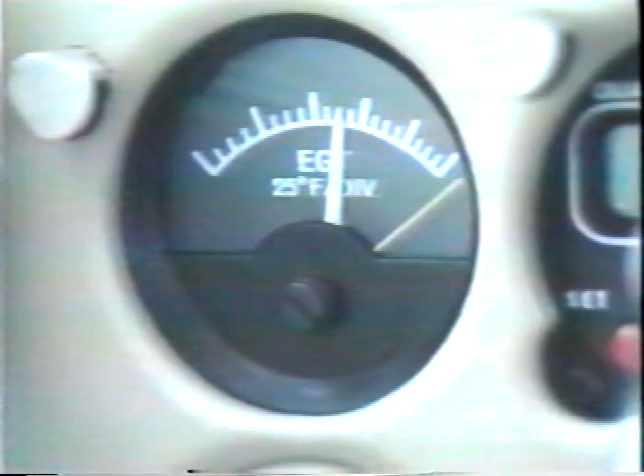If it is used properly in the leaning process, it will certainly extend engine life. Properly, one should lean until the EGT peaks. Then the mixture should be very carefully enriched to the point that the excess fuel drops the temperature 25 to 100 degrees. Many pilots still prefer to lean to a slight roughness and then enrichen to smooth out.

The argument being that uneven fuel distribution in the cylinders in carbureted engines might make for too wide a temperature variance cylinder to cylinder. If the EGT process leaves some roughness, this is probably so on your airplane, and you should continue the process to remove it.

As we lean the mixture past the peak temperature, excess air will act as a cooling medium, and the normal temperature inside the cylinder will begin to drop. As we enrich the mixture above 6 2/3%, excess fuel will act as a cooling medium, and the temperature will again begin to drop.

Best power is obtained at a slightly richer mixture than 15 to 1. Best power results when airspeed is maximized per pound of fuel burned. This is accomplished by allowing some of the fuel to go unburned and provide a slightly denser mixture in the cylinder. These unburned fuel droplets also carry off a lot of heat.

Most engines do not require leaning below 5,000 feet MSL, and we may expect to hold our full rich takeoff mixture setting to that altitude, although Cessna calls for 3,000 feet in some cases. We may expect to lose about 3% of our rated power for each 1,000 feet we climb, and the mixture will enrichen as the air becomes less dense.

At Denver, with a field elevation of 5,333 feet, a 90-degree Fahrenheit day, and a 5,500-foot pressure altitude, our aircraft would feel as though it were roughly at an 8,800-foot density altitude. This is going to grossly affect our takeoff performance.

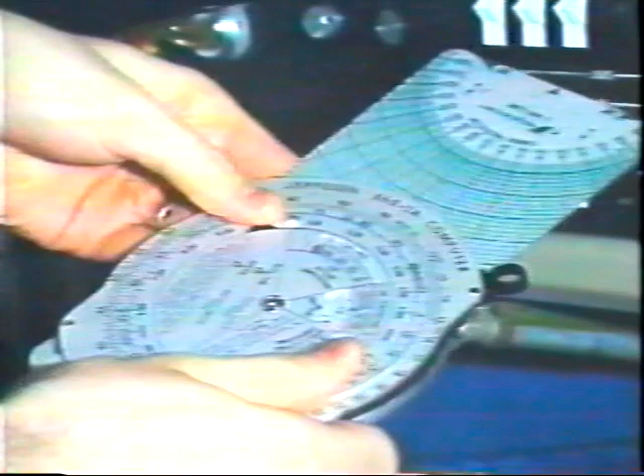How might we go about handling this high ambient condition? After engine start and during the taxi phase, we might experience engine roughness while at idle RPM of 1,000 to 1,200 RPM. If this is the case, we would like to lean the mixture to smooth out any engine roughness that we are experiencing while we taxi.

Just prior to takeoff, or possibly into position on the runway, we are going to make a very brief full power run up and manually lean back using the EGT or simply by removing engine roughness to establish the proper setting. Then we can continue our takeoff roll and rest assured that we have done just about all that can be done to develop the maximum amount of power available under these specific conditions.

Thus, as we make our power check early in the takeoff roll, we can cross-check our RPM, EGT, and the manifold pressure if available, and ensure that they are within the parameters we have predetermined during our pre-flight planning. This will also tell us if we have proper power output to continue the takeoff.

If we are uncomfortable with any of the readings, we should abort immediately within a safe stopping distance and return to correct the problem. This mindset, however, requires that we cross-check early and decide early.

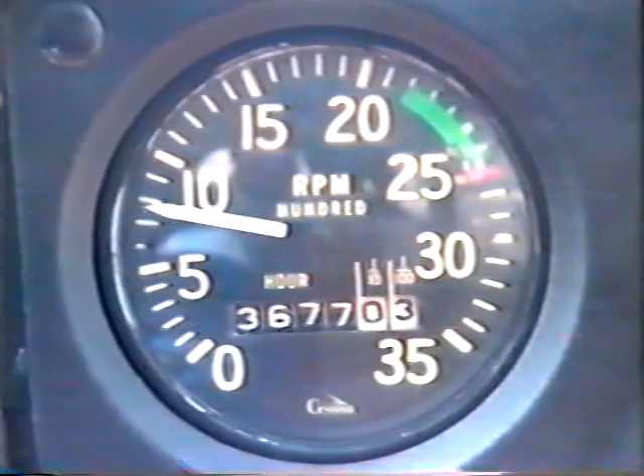One final note regarding mixture. A very simple pilot check for the mixture setting itself is the idle shutdown check. At shutdown, reduce the RPM to a low reading, perhaps in the 700 range, and close the mixture. If the setting is all right, you should get a slight rise in RPM before spool down. If there's no rise, the mixture is too lean. If there is a significant rise, the mixture is too rich.

The engine oil system is the wet sump type with a spin-on oil filter available as an option. The standard filter screen requires more attention, and it is recommended that oil be changed with this installation every 25 hours. Otherwise, the concerns to be checked are the same in each system.

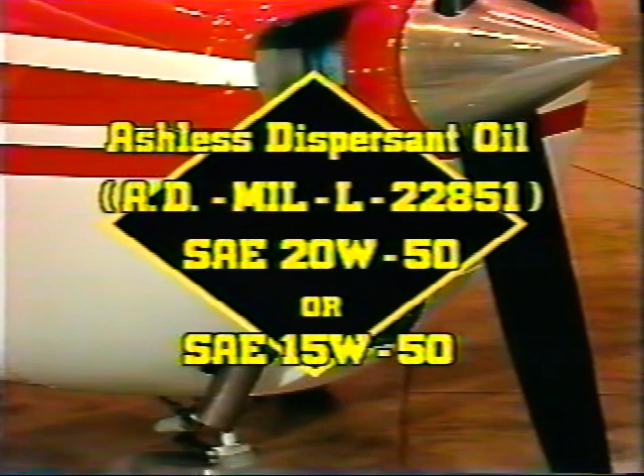The manufacturers recommend the use of ashless dispersant oil. SAE 20W50 or SAE 15W50 are acceptable for all temperature ranges.

Sludge is a product of improper use of the mixture, untimely oil changes, and intermittent stops and starts before there is a significant temperature rise. Detergent oil manufactured today supposedly will not desludge an engine to the point that the ports and galleries will be clogged, but this recent accident report suggests that there may be exceptions.

Quote: The engine failed on takeoff. Aircraft nosed over on landing. Use of detergent oil caused oil screen to clog. Unquote.

The sump has a capacity of 6 quarts. However, 7 may be installed when the oil and spin-on oil filter are changed because of the filter requirements. The oil level should not be allowed to fall below 4 quarts at any time.

Aside from being a lubricant, oil has another very important function: it removes excess heat fast enough from the internal parts of the engine to maintain a safe operating temperature. If the level is allowed to drop too low, this cooling process begins to deteriorate, and internal hot spots may operate at higher than normal temperatures.

These high temperatures in the hot areas of the engine will subject the oil to coking and oxidation. Coking tends to dirty the oil with carbon particles, while oxidation causes the oil to break down and thicken. A full flow oil filter will remove most of the carbon particles, but nothing can be done about oxidation except draining and replacing the old oil with clean oil.

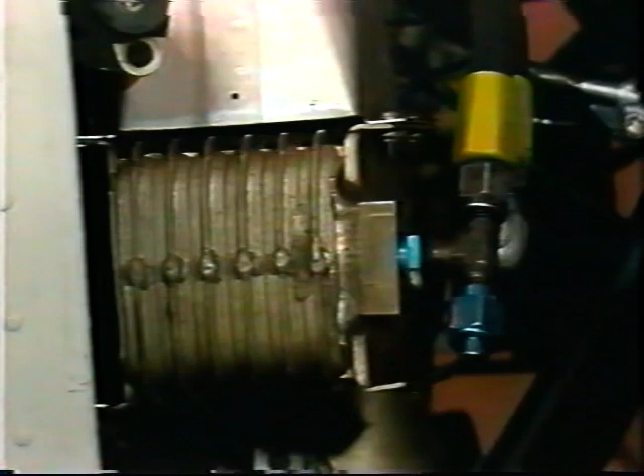In our walk-around, the engine accessory mounting flanges should always be checked carefully. You really can't afford to lose them.

Quote: Found oil cooler right side mounting flange broken, attached to aircraft on right side with only 2 holding holes rather than the 6 on that side. The left mounting flange was found whole and secured. Cause for this was probably vibration. Unquote.

About 1/3 of the engine heat is dissipated with the oil and oil cooler, and in the event of an oil temperature rise, the cooler should be checked after a flight by placing a hand on the cooler itself.

If it isn't hot, it isn't working, and the first check should be the Vernatherm. It may be worn and require replacement.

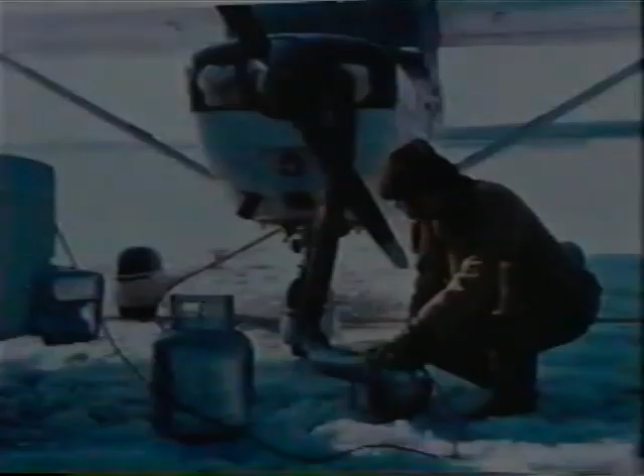In discussing engine operation and overall engine care, cold weather operations must be considered. The cold weather start is extremely trying for your engine. This is a time in which it undergoes a very drastic temperature change in a very short time span. It is a time in which the need for lubrication is as great as we will find in any phase of engine operation.

Unfortunately, it is also a time in which we do not have very effective lubrication. For this reason, we must stress the use of preheat or a warm hangar for cold engine starts. Generally, anything below 20 degrees Fahrenheit would warrant the use of preheat if no hangar is available. This assumes that the engine has completely cooled and has been sitting in this condition for a considerable period of time.

When starting a cold engine, it is recommended that oil temperatures be brought up to 75 degrees Fahrenheit, or roughly 24 degrees centigrade, prior to operating the engine above 1200 RPM. This will ensure that the oil's viscosity is at a point where a higher RPM is not harmful in terms of adequate lubrication.

Remember that without the oil circulating, some very expensive metal is rubbing together and chewing up metal surfaces and dollars simultaneously. Just to make life more difficult, you should know that under no circumstances should you let your engine idle under 1000 RPM anytime, unless you enjoy plug changes, overheating, and low batteries.

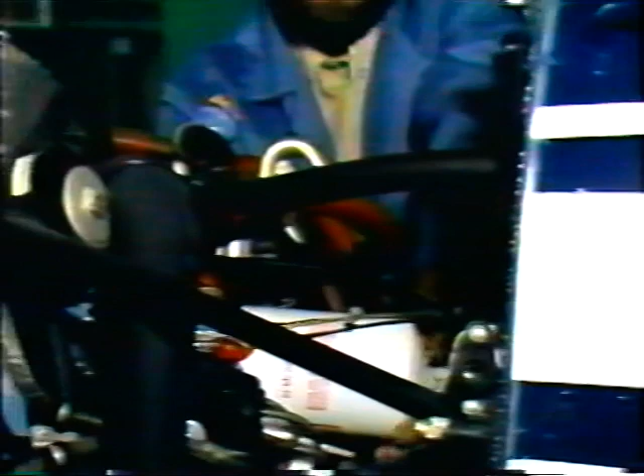The compression check should be accomplished by a qualified mechanic. The full flow oil filter, checked each 50 hours, will tell you much about your engine. It often provides the first clues to an imminent catastrophic failure in time to prevent it.

When the filter is removed and opened up, it should be thoroughly checked for contaminants, particularly metal. A small magnet should be used to search for ferrous metals, and if suspicion arises, it might be wise to wash the filter with solvent and check the residue with a magnet. If you are doing this yourself and find any indication whatsoever of this problem, hold the evidence and get your mechanic to check it.

A typical SDR worthy of note makes a strong case for regular oil changes and a thorough filter check for metal and contaminants. Quote: 50-hour oil and filter change and compliance with AD 80-04-03R2 Amendment 39-5893, metal chips were detected in oil filter. On inspection of hydraulic tappets, number 2 cylinder exhaust tappet was severely spalled and chipped. Cam lobe was also badly spalled and grooved, unquote.

This was the H2AD engine introduced on the 172N in 1977. It was designed to operate on 100 low lead and was particularly prone to spalling problems. It was an embarrassment to both Lycoming and Cessna. After extensive modification on engines in the field and a factory improvement starting with serial number 7967, the problem was helped. However, the engine is still regarded with suspicion in some circles, perhaps unjustly. The replacement D2J was introduced in 1981.

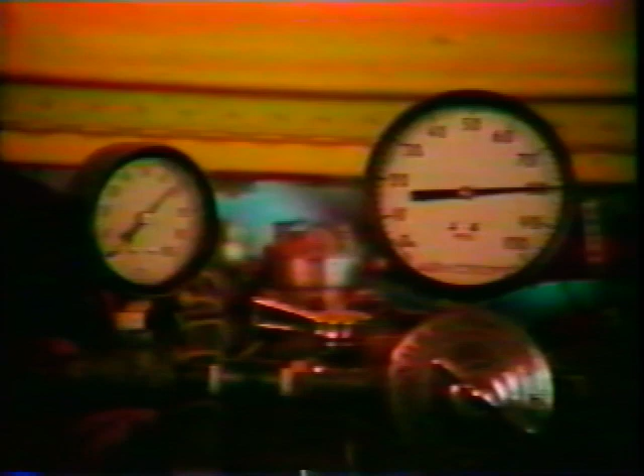A normal range may be 67 to 75 psi. A reading below 60 out of 80 is cause for some alarm, and we would suspect that the cylinder should be pulled from the engine for closer inspection.

Another very effective procedure for troubleshooting the cylinder is the use of a borescope. A lighted scope is inserted through the spark plug hole, and the mechanic is able to see the interior of the cylinder and usually make an evaluation.

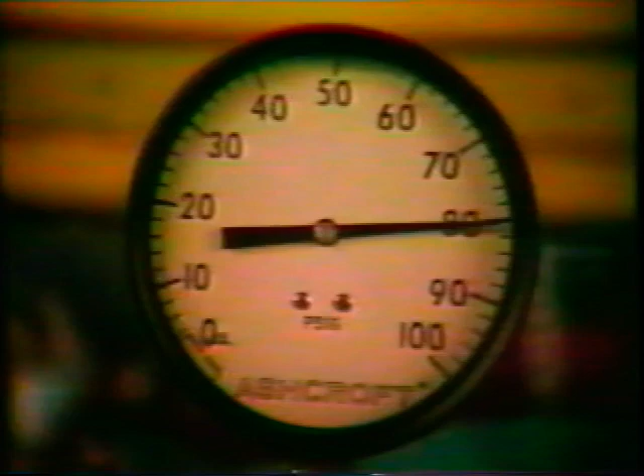Inevitably, you will confront the problem of TBO, or time before overhaul. You should know that this is a suggested or recommended time only. If oil consumption records and the checks mentioned above are performed by a qualified mechanic who gives your engine a clean bill of health, many owners would choose to continue operation until less favorable testing results appear. That is your option. If you choose this route, be very careful and monitor it closely.

An exception might be a bulletin from on high, which says that a component in your engine, which you have never heard of, is failing badly and should have early attention. A teardown or perhaps an early overhaul is the prescription. Listen and heed. Somewhere in that bureaucratic maze is a fellow who knows what he is talking about.

Finally, the day will come when you will have to replace the engine, and we should review the procedures to break in a new or overhauled engine, or when new or overhauled cylinders are installed. Use the recommended oil and stay with it for the full break-in period. Change oil and filter as recommended in the pilot's operating handbook, more frequently if you are operating in a time and place where the atmosphere is dirty.

Every takeoff should be made at full power, and in a 172 the power may be maintained until you have reached cruise altitude. The placard permitting 2700 RPM was originally proposed by the sales department at Cessna in the hopes that the increased performance would be attractive to potential buyers. We understand the technical people were opposed, but were pleasantly surprised to find it seemed to be having no effect on engine life. We have not seen the data that support this.

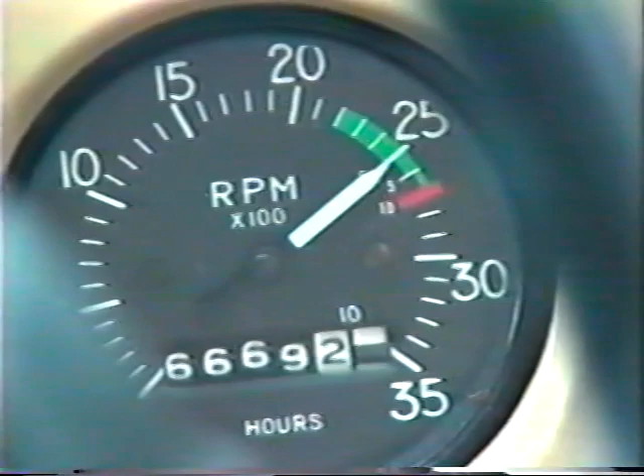A brief explanation is in order at this point. Higher power settings are needed to develop the cylinder pressures necessary to push the rings onto the cylinder wall. The pressure has to be great enough to rupture the oil film and permit the ring to come into contact with the wall. This ring and cylinder wall contact has to be maintained until a smooth, compatible surface exists between the two. When this happens, the break-in period should be complete.

It takes approximately 25 to 50 hours to complete this process if the above steps are followed. The break-in process should be completed in as short a time as possible. The only way to do this is with the higher power settings. The lower power will not provide enough cylinder pressures to push the ring hard against the cylinder wall, and the break-in period would then be extended over a long period of time.

In the meanwhile, oxidation of the oil will begin to glaze and fill in those grooves. If the glazing takes place before the complete mating of ring to cylinder wall, the end result will be higher oil consumption. The only remedy in this case would be to hone the cylinders and install new rings. This could be very costly.

High-speed descents with very low power create other enemies of engine life. In cold temperatures, these types of descents may lead to shock cooling, which may cause rapid contraction of metal parts. This will eventually lead to cracks on the cylinders, the spark plug holes, and any openings that are subject to stress and fatigue. This sets the stage for another phenomenon known as ring flutter.